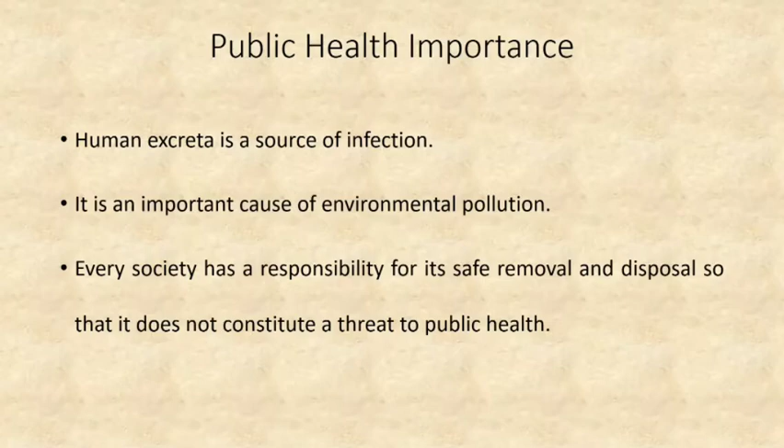So first of all, what is the public health importance? Human excreta is a source of infection and it is an important cause of environmental pollution. So every society has responsibility for its safe removal and disposal so that it does not constitute a threat to public health. The health hazards of improper excreta disposal are soil pollution, water pollution, contamination of foods, and propagation of flies. And last, due to this, there are multiple disease conditions.

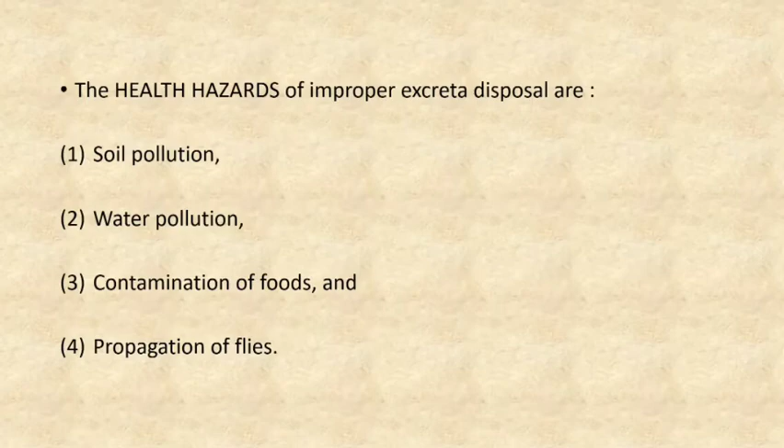The resulting diseases are typhoid, paratyphoid, dysentery, diarrhea, cholera, hookworm diseases, ascariasis, viral hepatitis, and similar other intestinal infections and parasitic infestations. So due to improper excreta disposal, there are a number of diseases. These are not only a burden on the community in terms of sickness, mortality, and low expectation of life, but a basic deterrent to social and economic progress. So proper disposal of human excreta is a fundamental environmental health service without which there cannot be any improvement in the state of community health. So excreta disposal is very important.

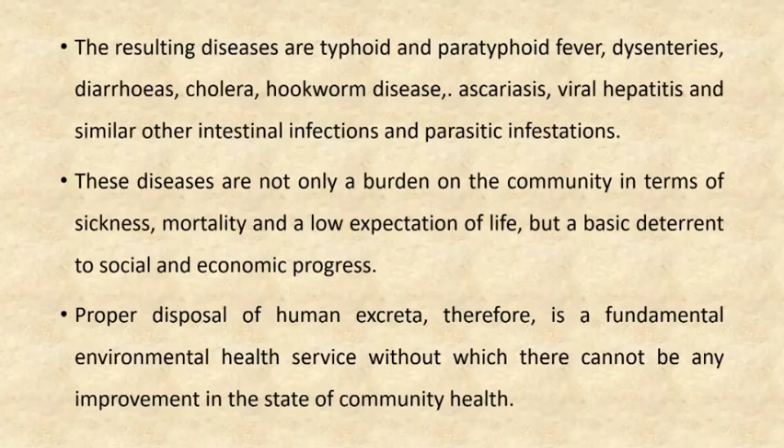So what is the extent of the problem in India? In many areas of the world, including India, excreta disposal is a problem of grave importance. Nearly 70% of India's population live in rural areas and the majority of them go to the fields for defecation and thereby pollute the environment with human excrement. Statistics indicate that the intestinal group of diseases claim about 5 million lives every year, while another 50 million people suffer from these infections. So you can see it is a very major problem.

Surveys carried out in community development block areas in Andhra Pradesh, Assam, Bihar, Madhya Pradesh, Manipur, Orissa, Rajasthan, and West Bengal have shown that the enteric group of fever is very common in rural areas because of improper disposal of waste. Hookworm disease is known to be highly prevalent. About 45 million people are estimated to be infested with hookworms.

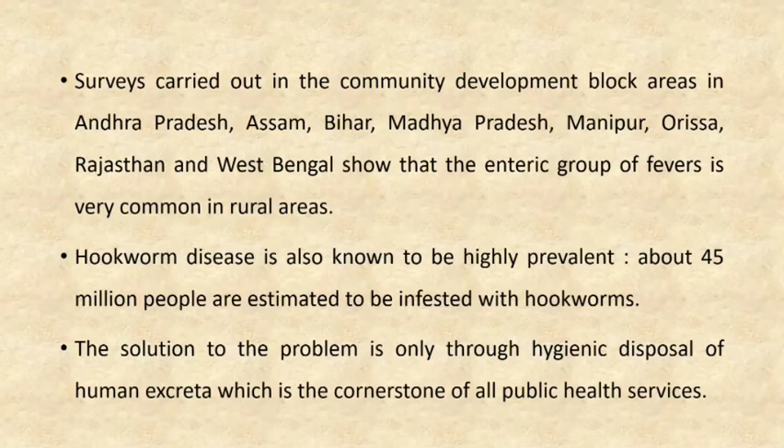So first of all, how is disease carried from excreta? The human excreta of a sick person or carrier of disease is the main focus of infection. It contains the disease agent, which is transmitted to the new host through various channels like water, fingers, flies, soil

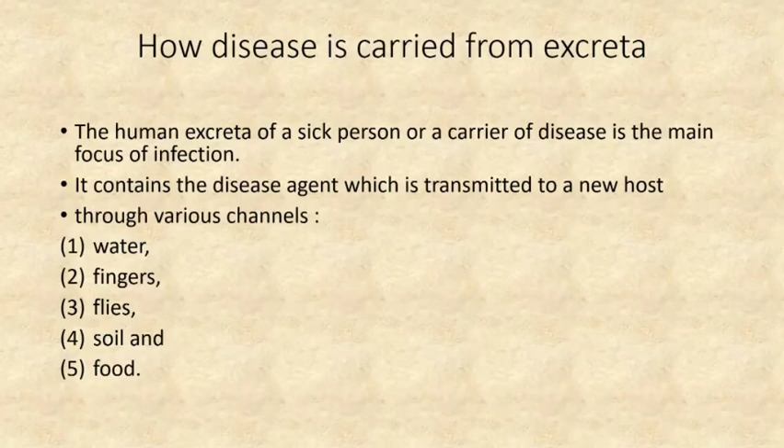and food. We can see in a diagrammatic form that the feces of an infected person or a carrier person is transmitted through water, fingers, flies and soil to the food, and from that to the new host, meaning the healthy man. In this way, the disease is carried from excreta.

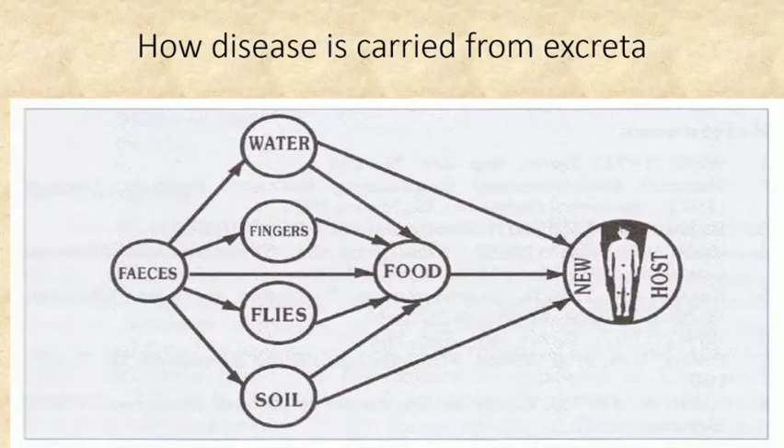So there is a concept like sanitation barrier. So what is this? Sanitation barrier. Community medicine aims at breaking the disease cycle at vulnerable points. The disease cycle may be broken at various levels like segregation of feces, protection of water supplies, protection of foods, personal hygiene and control of flies.

So how can we break the cycle? Like segregation of feces, protection of water supplies, protection of foods, personal hygiene and through control of flies. And of this, the most effective step would be to segregate the feces and arrange for its proper disposal so that the disease agent cannot reach the new host directly or indirectly.

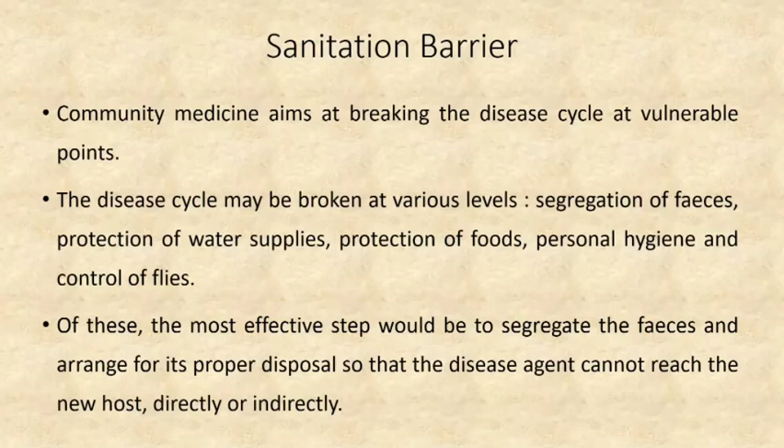So how can we break the cycle? Like segregation of feces, protection of water supplies, protection of foods, personal hygiene and through control of flies. But the most important step is if we have done segregation of feces and arranged the proper disposal, then the disease agent cannot reach the new host directly or indirectly.

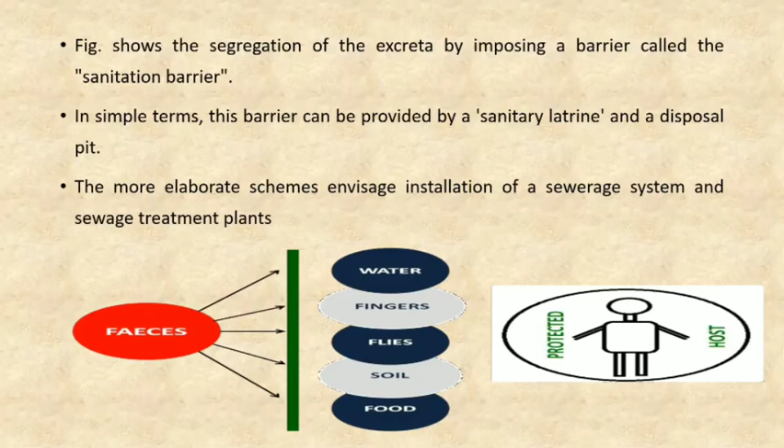So what are the methods of excreta disposal? There are a number of methods of excreta disposal. Some are applicable to unsewered areas and some are for sewered areas. The important classification is unsewered area and sewered area. In unsewered areas, the first type is service type latrines. It is also called the conservancy system. Here, the night soil is collected from pail or bucket type latrines by human agency and later it is disposed of by burying or by composting.

So the first type is service type latrines. The second type is non-service type latrines, also called sanitary latrines. You have a 10 marks question for sanitary latrines. Very important question, frequently repeated. Sanitary latrines have subtypes like borehole latrine, dug well or pit latrine, water seal type of latrine, in which we also have subtypes like PRAI type, RCA type, Sulabh Shauchalaya. Next type is septic tank and the last one is aqua privy. We'll see one by one in detail.

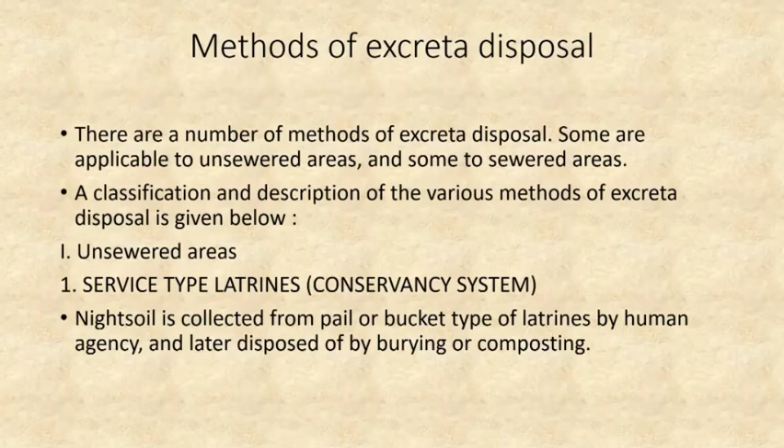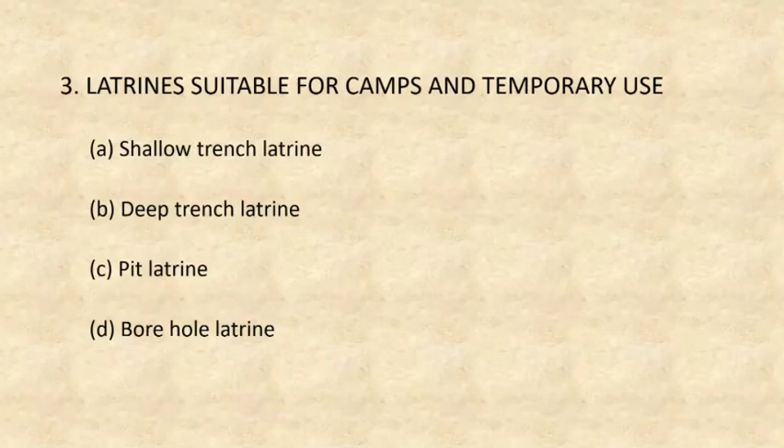The third type of unsewered is latrines suitable for camps and for temporary use, in which we have shallow trench latrine, deep trench latrine, pit latrine and borehole latrine. So in unsewered type, first is service type latrine, also called the conservancy system. Second is non-service type, that is sanitary latrines, like borehole latrine, dug well or pit latrine, water seal type latrines, septic tanks and aqua privy. And third is latrines suitable for camps and temporary use: shallow trench latrine, deep trench latrine, pit latrine and borehole latrine.

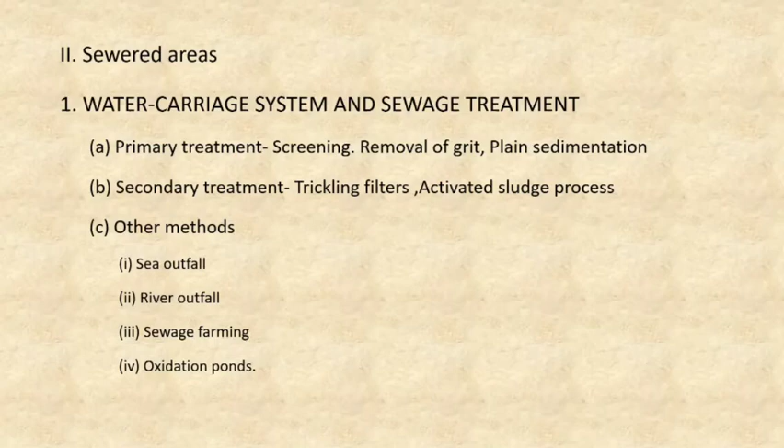The second major type is sewered areas. In sewered areas, the first type is water carriage system and sewage treatment. First is primary treatment like screening, removal of grit and plain sedimentation. Second is secondary treatment, where trickling filters and activated sludge processes are used. Other methods are sea outfall, river outfall, sewage farming and oxidation ponds. We'll see each type in detail. So first we'll start with excreta disposal in unsewered areas.

So the first type in unsewered areas is the service type. It is also called the conservancy system. Here the collection and removal of night soil from bucket or pail latrines is done by human agency. So it is called the service type or conservancy system, and these latrines are called service latrines.

This night soil, which is collected by human agency, is transported in night soil carts to the place of final disposal, where it is disposed of by composting or by burial in shallow trenches. So in this service type system, the collection and removal of night soil from bucket latrines is done by human agency, and the latrines are called service latrines. And that night soil is transported in night soil carts to the place of final disposal, where it is disposed of by composting or by burial in shallow trenches.

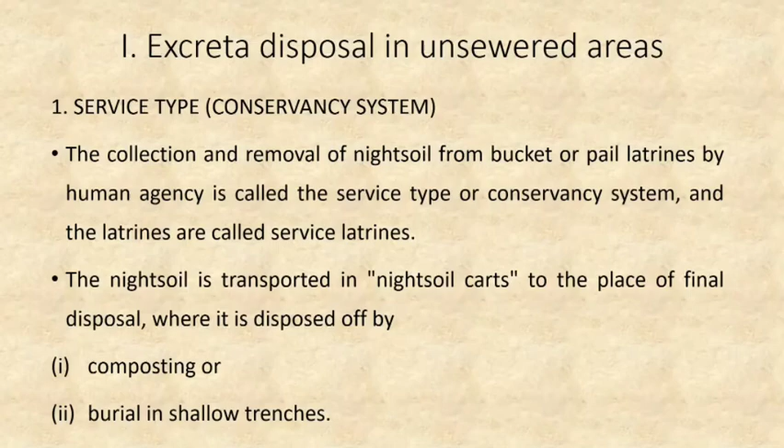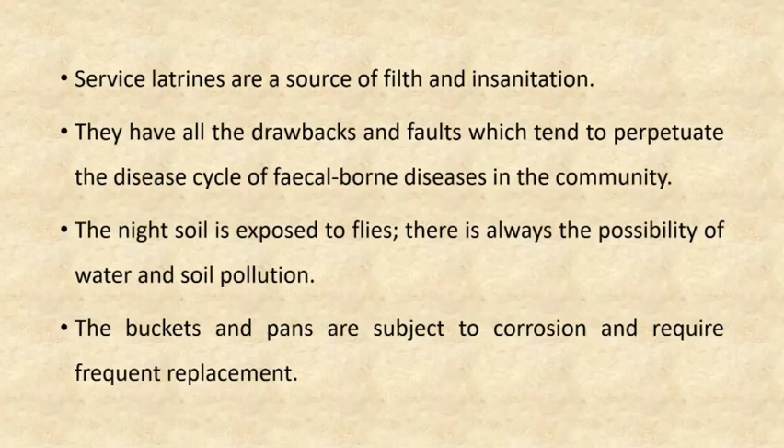Service latrines are a source of filth and insanitation. They have all the drawbacks and faults which tend to perpetuate the disease cycle of fecal-borne diseases in the community, because the night soil is exposed to flies and there is always a possibility of water and soil pollution. The buckets and pans are also subject to corrosion and require frequent replacement. Also, the emptying operation of buckets is not always satisfactory, and it is difficult to recruit adequate staff needed for collection of night soil.

And the employment of human labor for collection of night soil is not consistent with human dignity and is no longer pardonable. So the Environmental Hygiene Committee therefore recommended that in unsewered areas, the service latrine should be replaced by sanitary latrines, which require no service and in which excreta can be disposed of at the site of the latrine in a hygienic manner. So this system is most unhygienic.

So the Environmental Hygiene Committee recommended that in unsewered areas, service latrines should be replaced by sanitary latrines, because there is no requirement of service or human employees, and excreta can be disposed of at the site of the latrine in a hygienic manner. The second type is the non-service type of latrines.

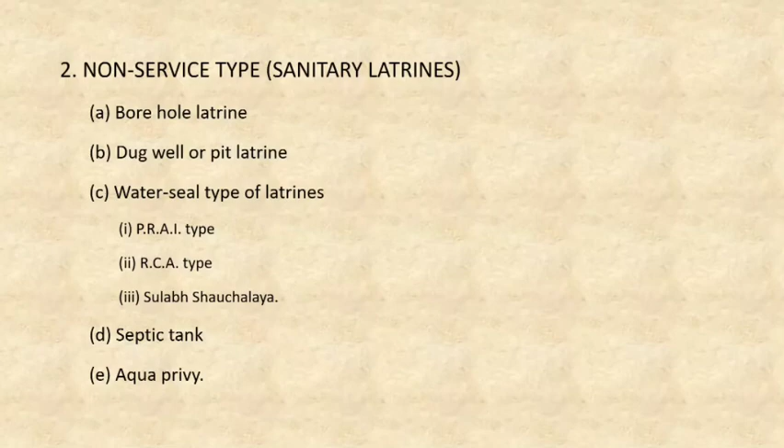So we have seen the types of non-service type latrines or sanitary latrines. These are the borehole latrine, dug well or pit latrine, water seal type of latrine, in which we have PRAI type, RCA type, Sulabh Shauchalaya, then septic tank and aqua privy. So these are the types of non-service type latrine. We'll see them one by one. First is the borehole latrine.

The borehole latrine is the forerunner of the non-service type of latrine in this country. It was first introduced by the Rockefeller Foundation during the 1930s in the campaigns of hookworm control.

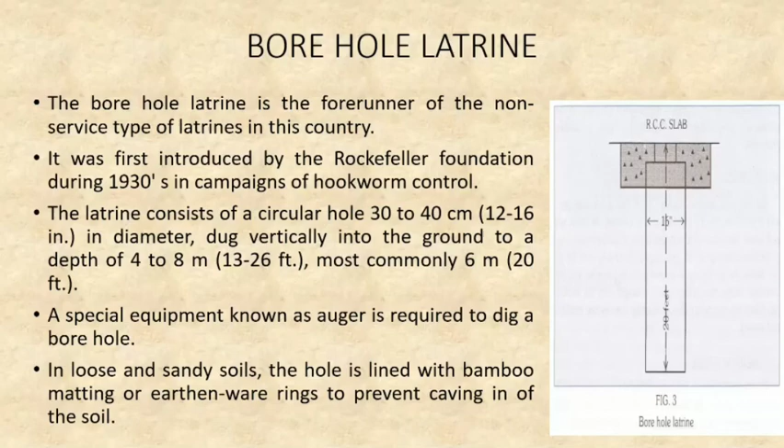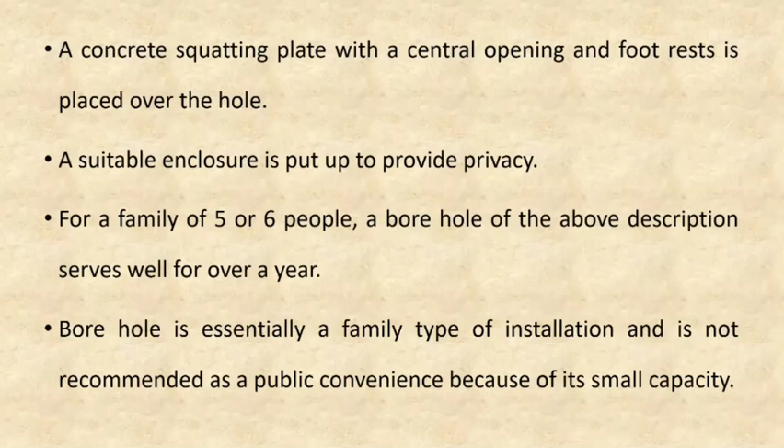Concrete squatting plate with a central opening and footrest is placed over the hole and suitable enclosure is put to provide privacy, and it is for a family type of installation. When the contents of borehole reach within 50 centimeter of the ground level, the squatting plate is removed and the hole is closed with earth.

The night soil undergoes purification by anaerobic digestion and it is eventually converted into a harmless mass. The amount of sludge that accumulates has been estimated to amount to 2.1 to 7.3 cubic feet per 1000 users days.

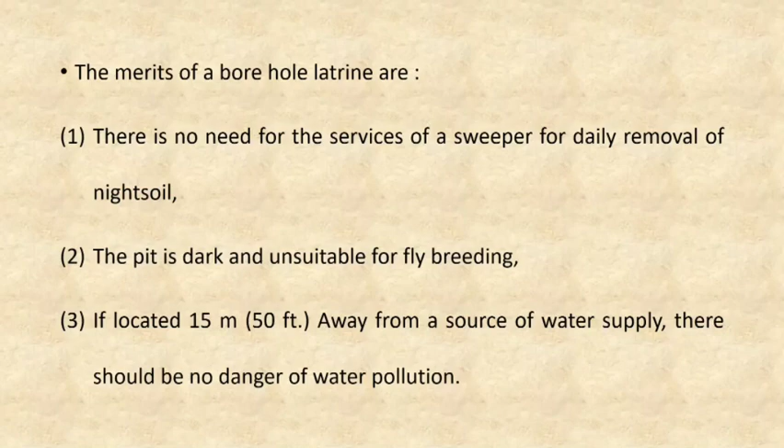So we have merits for borehole latrine, but in spite of these merits, borehole latrines are not considered very suitable type of latrine today because the borehole fills up rapidly because of its small capacity. A special equipment, the auger, is required for its construction, which may not be readily available. In many places, the subsoil water is high and the soil is loose. With the result, it may be difficult to dig a hole deeper than 3 meters.

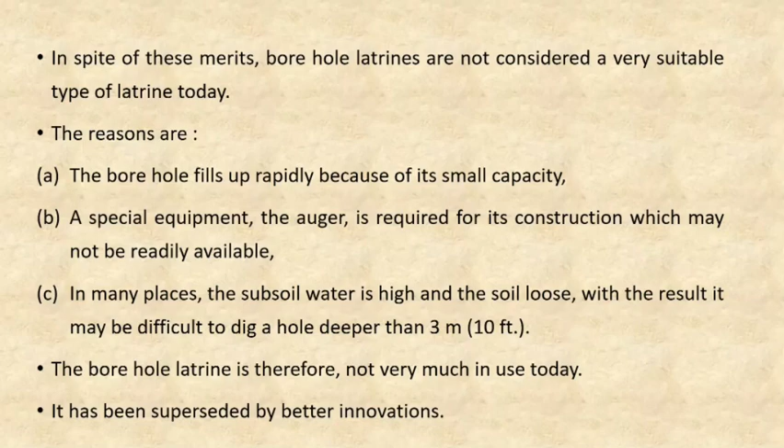The borehole latrine is therefore not very much in use today. It has been superseded by better innovations. Then second type is dug well latrine or pit latrine. So the dug well latrine or pit latrine was first introduced in Singur, West Bengal in 1949-1950. It is the improvement over the borehole latrine.

Here, a circular pit of about 75 centimeter, that is 30 inches. In borehole, it is 16 inches. So it is 30 inches in diameter and 3 to 3.5 meter, that is 10 to 12 feet deep, is dug into the ground for the reception of night soil. So it is a circular pit about 75 centimeter in diameter and 3 to 3.5 meter deep. In sandy soil, the depth of the pit may be reduced to 1.5 to 2 meter.

The pit may be lined with pottery rings, as many rings as are necessary to prevent caving in of the soil. Here also a concrete squatting plate is placed on the top of the pit and the latrine is enclosed with superstructure. The advantages of this type of latrine are it is easy to construct and no special equipment such as auger is needed to dig the pit. The pit has a longer life than the borehole because of great cubic capacity.

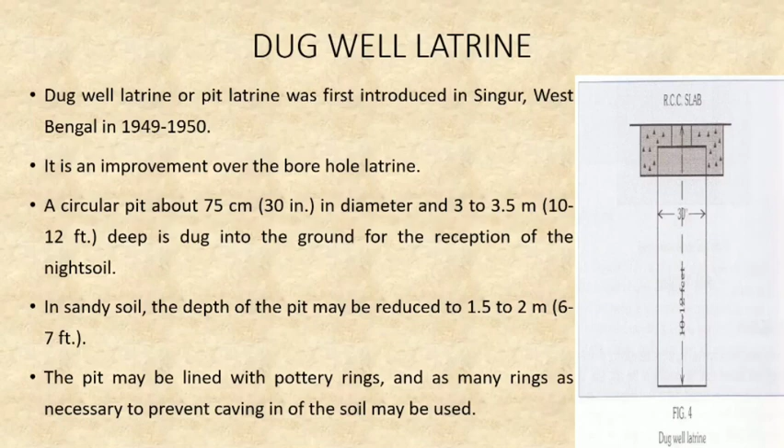So we have seen the dug well latrine or pit latrine was first introduced in Singur, West Bengal in 1949 and 1950. Here a circular pit about 75 centimeter in diameter and 3 to 3.5 meter deep is dug into the ground. In sandy soil, the depth of the pit may be reduced to 1.5 to 2 meter. A concrete squatting plate is placed on the top of the pit and the latrine is enclosed with superstructure. Here the advantages are it is easy to construct and no special equipment such as auger is needed to dig the pit. The pit has a longer life than the borehole because of greater cubic capacity.

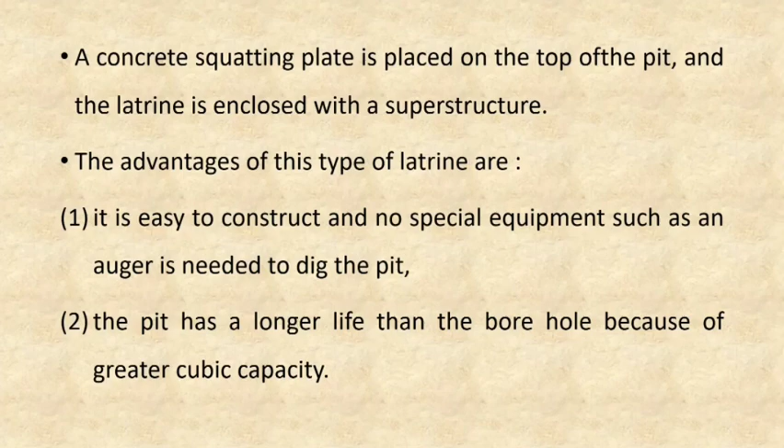Then a pit of 75 centimeter diameter and 3 to 3.5 meter deep will last for about 5 years for a family of 4 to 5 persons. When the pit is filled up, a new pit is constructed. The action of dug well latrine is the same as the borehole, that is anaerobic digestion.

So, next part will continue tomorrow.